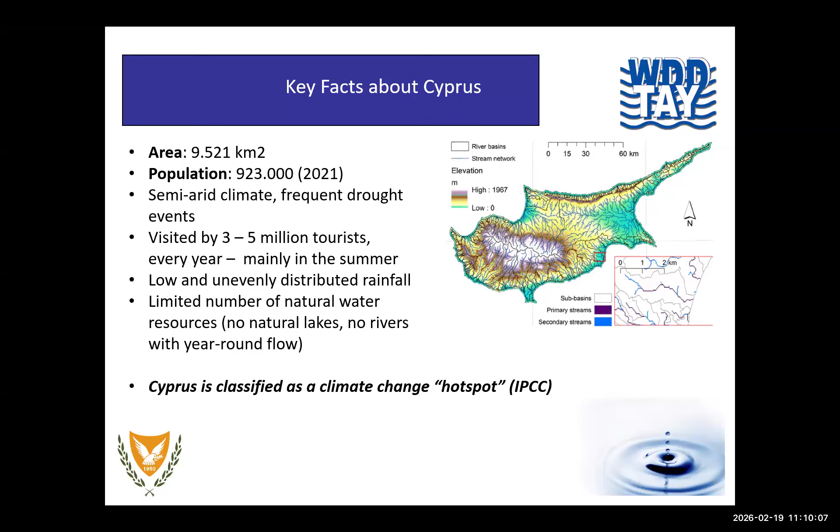We are facing low and unevenly distributed rainfall, and we have a very limited number of natural water resources. Basically, we don't have any permanent surface water, no perennial rivers, and no natural lakes. And the IPCC characterizes Cyprus as a climate change hotspot island, and we can see this rapid climate change within the last 20 years. So this poses a big problem for us.

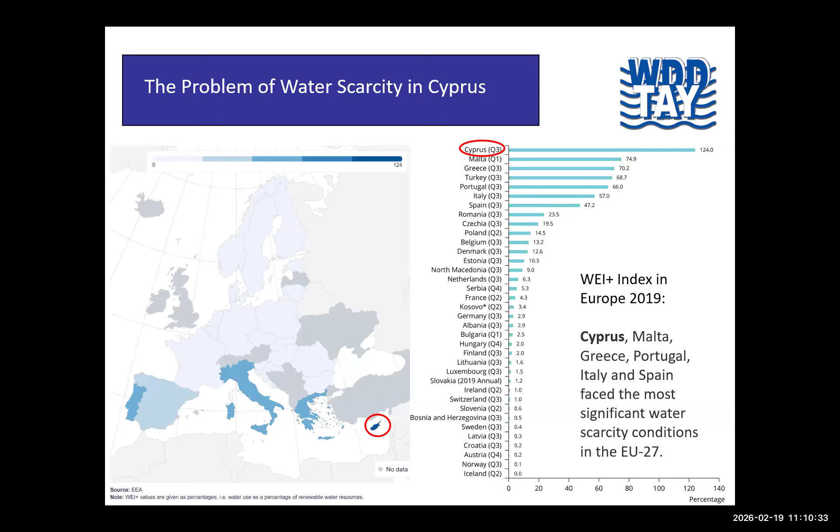According to the WEI+ index in Europe, this is the 2019 one. There is actually a revised one from 2022, but the result is more or less the same. Cyprus is by far the most water-stressed country in Europe, quite far ahead of Malta, Greece, and other countries which share similar problems.

Sorry, there was supposed to be... Okay. Anyway, I will proceed. The statistical analysis of the rain shows that... I'm really sorry. I think there might be a problem with the presentation. Actually, I will try to share it again. Oh, okay. Now I see what's going on.

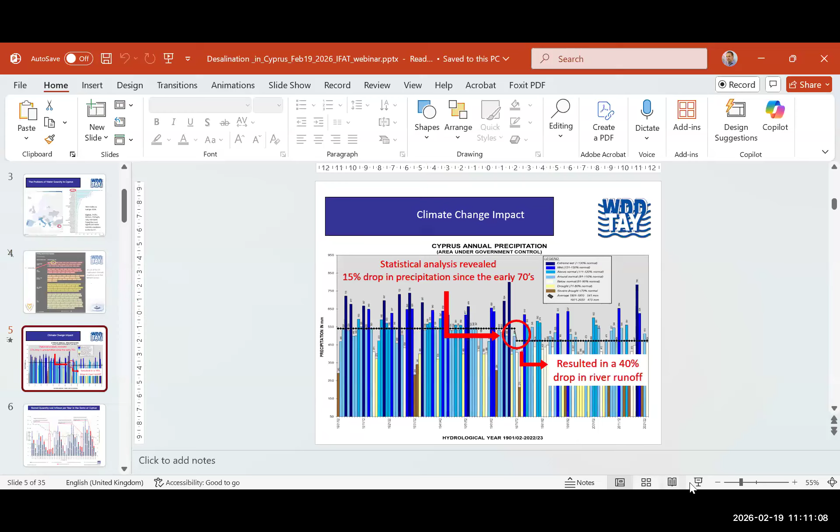Right. So the statistical analysis of the rainfall, the precipitation, shows that there has been a gradual drop since the 70s of approximately 15%. But in reality, this translates into an even bigger drop in the river runoff and the levels of water that we managed to collect in our dams, which is approximately 40%.

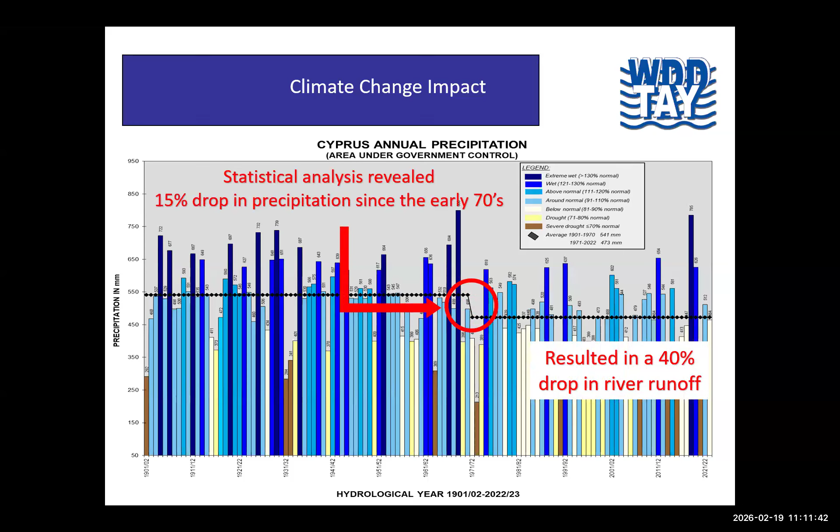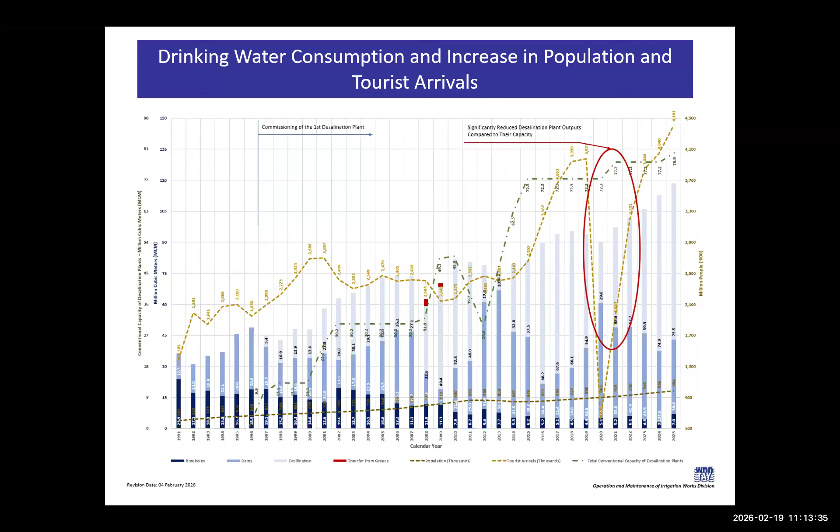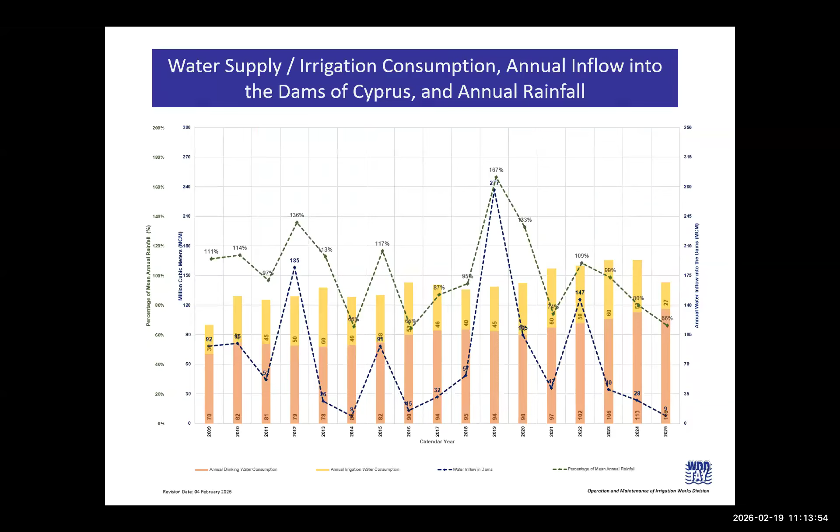Here again, you can see that the annual inflow in the dams and the annual rainfall is quite variable, whereas the actual needs are always there and quite often are increasing. And what is quite important is to note that the drinking water demand has tripled since 1991, as you can see in this graph, which poses an even higher burden on our water supply system.

The reasons for this increase are many and different. There's the increasing population, rising living standards, increase in tourism, both in terms of numbers, but also in terms of the extension of the tourist season, increased water losses from the networks. But what we have found recently is that because of the droughts and the lack of reliability of the boreholes, whenever we connect the community to the public supply, they tend to stop using the boreholes and switch to the public supply, either because the boreholes have dried up or because it's just simpler and more reliable. And of course, climate change has played a significant role.

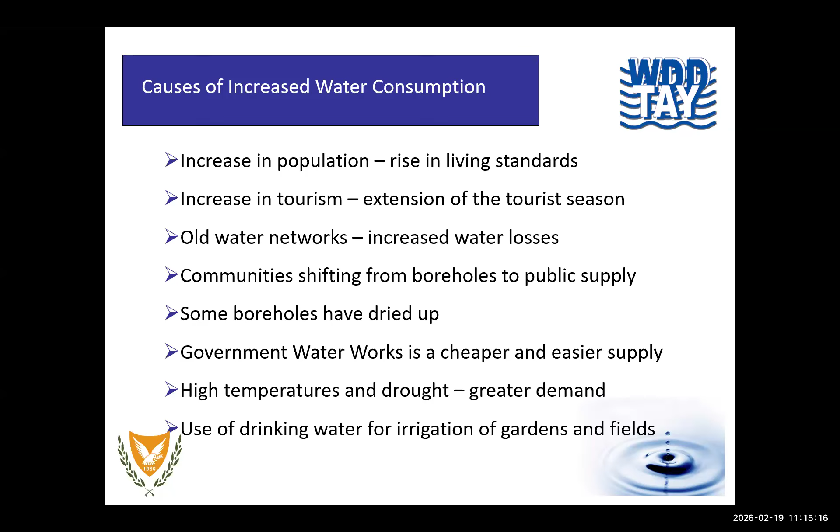The problem is not new. We have been facing this problem since antiquity, I would say. The big efforts to provide a solution started from the 60s when the republic was established. And over the years, we have provided a lot of infrastructure to deal with this problem. The core of our infrastructure is the 110 dams that we have built all over Cyprus in order to collect as much, if not all, of the precipitation that falls on the island, to be able to use it to cover our needs.

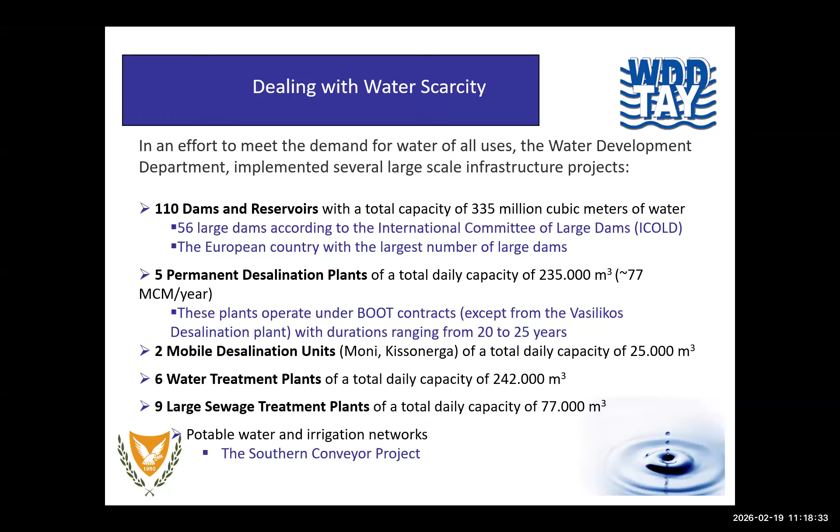It's important to mention the sewage treatment plants because Cyprus is leading in terms of the use of reclaimed water for irrigation purposes. We are currently reusing approximately 89% of the treated wastewater in the areas controlled by the Republic. This has happened out of necessity during the last 25 years, simply because it was the only way to add a reliable source of water for our irrigation needs.

As I mentioned before, currently there are 5 permanent desalination plants in operation with a nominal capacity of 235,000 cubic meters per day. 2 more were put in operation in 2025, and we have plans to build several more. The plan is to reach a total capacity of a little bit more than 400,000 cubic meters per day, so that we can cover the water supply needs at 100% rate with some spare capacity.

The preferred mode of operation of desalination plants is to have them built as PPP, public-private partnerships, under the build, own, operate, transfer contract. In this way, the private companies use their own funds to undertake the design, the construction, and the operation for a fixed period of time, and we pay to receive the water with a unit fee, which is a function of the energy consumption and the fixed costs of plant ownership. And in case the operation of the plant is not required, then we pay a standby fee to the contractor so that he can cover the basic costs.

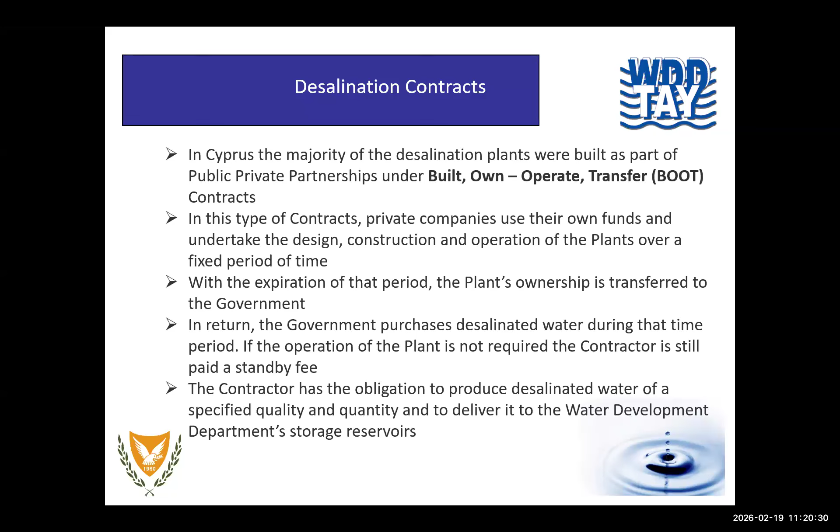Here you see a breakdown of the 5 main desalination units we currently have in operation in Cyprus. 4 of them are of the type that I mentioned. One of them, which is owned by the public electricity unit, is slightly different because they own the plant, but they also provide the quantities in the same manner. And you can see roughly the capacities of each of these units, the nominal capacity and the minimum daily production that they're required to provide.

You can also see the contract unit price and also the adjusted unit price currently, including the electricity tariff and labor index. So you can see the desalinated water in Cyprus is not cheap compared to other areas, and this has to do primarily with the high energy cost on the island. But it is a necessity for us, so we are quite happy that we have the luxury to have this water even at the higher rates compared to other countries.

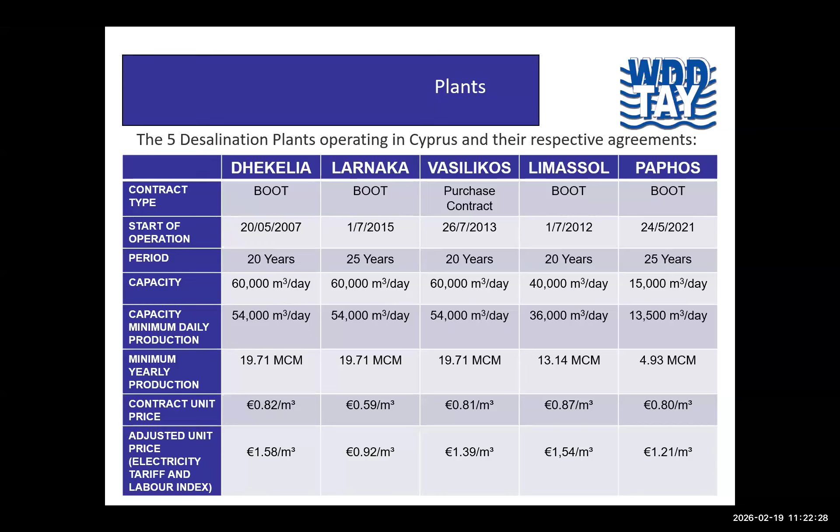You can see some pictures from our large desalination units here, large for our standards, of course. They might be quite small compared to some of the units in Spain or Saudi Arabia and so on, but they are quite big for us. And as I said, they are the backbone of our water supply.

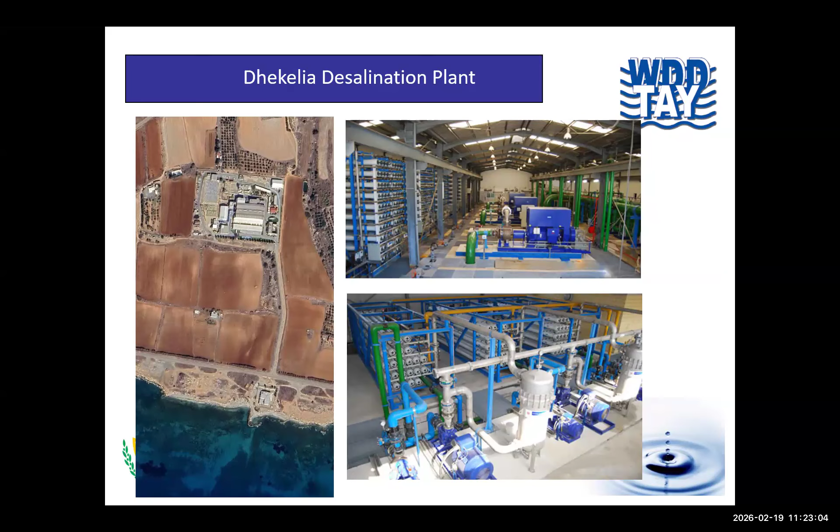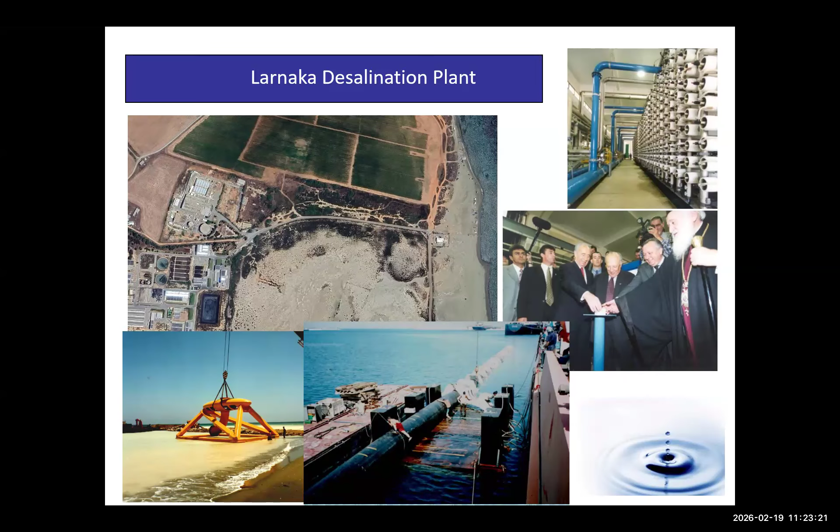You can see here the Dhekelia desalination plant, which is the earliest one. It was built in 1997, but what you see here was refurbished in the early 2000s. The Larnaca desalination plant is the oldest operating at the moment, and you can see here some images of the then President of the Republic during the initiation of the operation, showing again the importance of these units for our livelihood.

The Episcopi desalination plant, the Vasilikos desalination plant, which is the one operated by the EAC, the Electricity Authority of Cyprus, which I mentioned is owned by them. What is quite important for this unit is that it is taking advantage of the synergies of the fact that it is located within

the area of the largest power plant in the country, and it is using the water which is also used for cooling purposes of the power station. So the return of the brine is highly diluted with the cooling water, making it far easier to dispose of it without the need of long and complex pipelines.

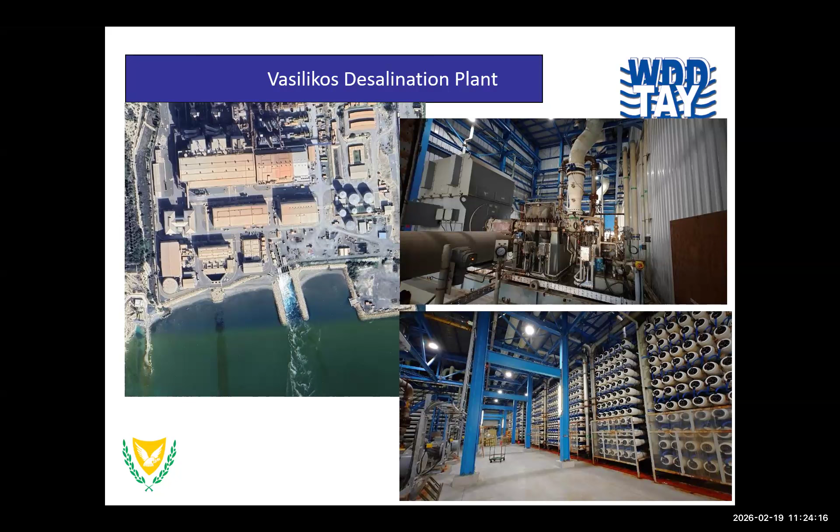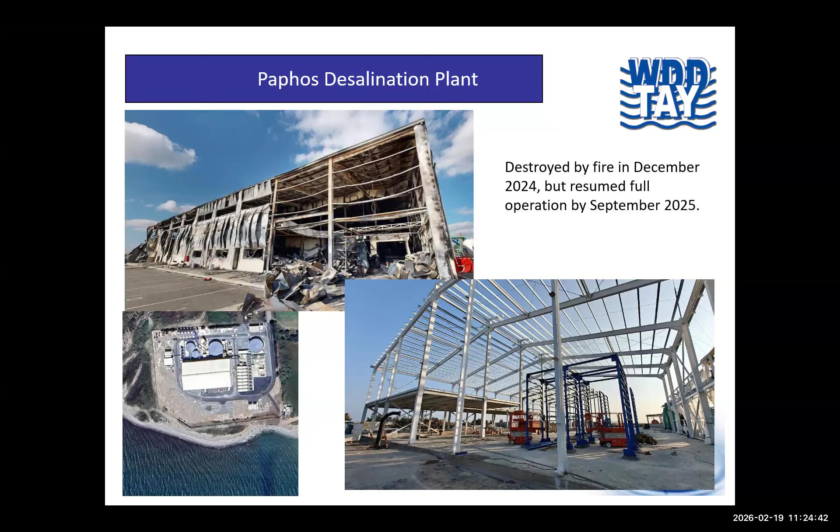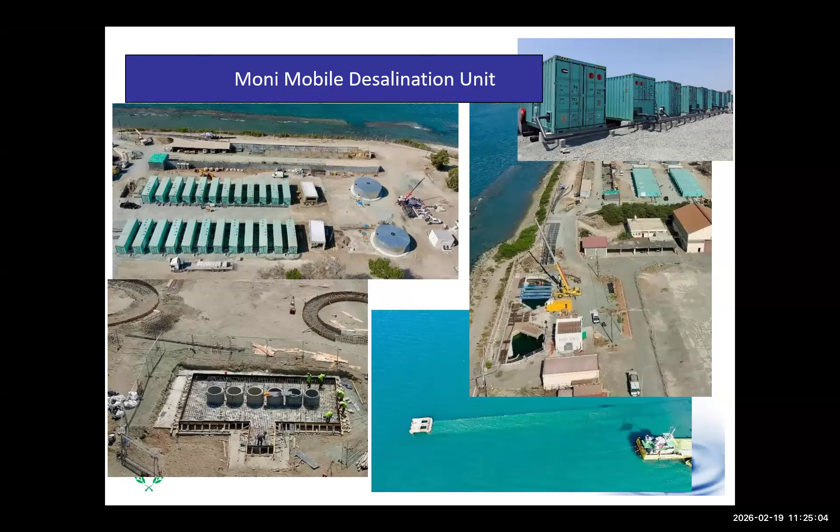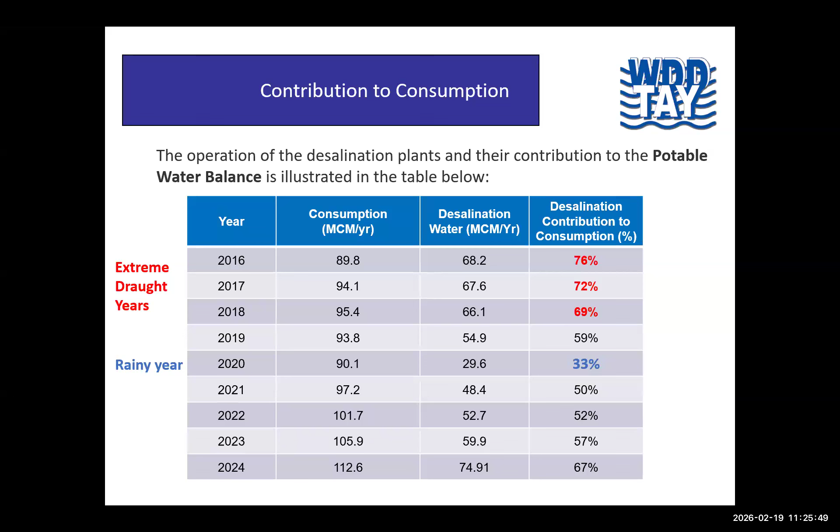But currently in 2025, even though I do not have the figures, I think it has reached back to levels of 70 or 76%. As I mentioned, the strategy of Cyprus will be in the next few years to be able to reach a capacity of up to 100% of the consumption of drinking water.

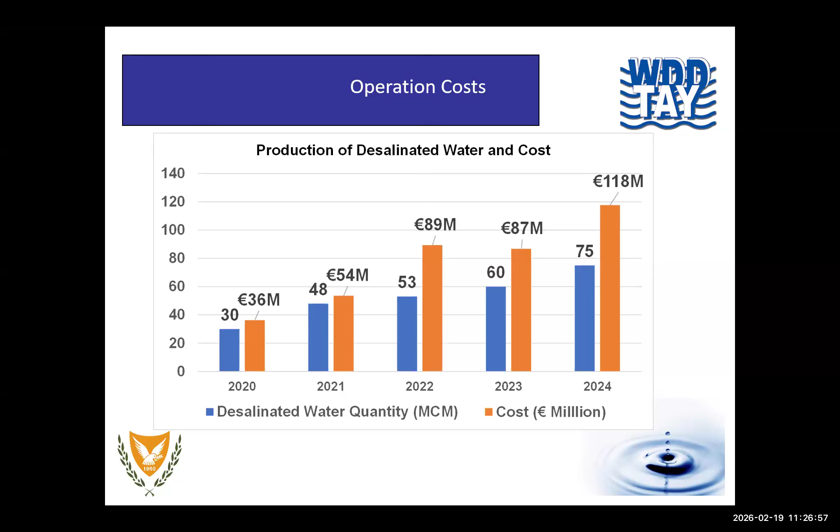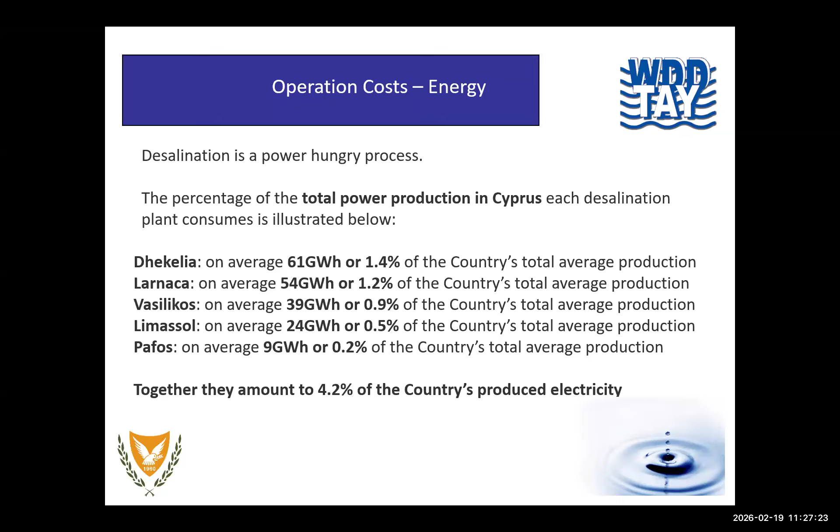And it also has a big effect on power consumption. All of the units at the moment are being fed with fossil fuels, with an estimated figure of 4.2% of the country's total produced electricity. So this is a big burden, not only in terms of cost, but also in terms of energy requirement and, of course, for environmental purposes.

The benefits of using desalination are quite high. Desalination ensures a stable supply of drinking water throughout the year, irrespective of the weather conditions, and reduces the dependence on rainfall and reservoir storage. It meets growing demand under climate change conditions, which reduce the capacity for surface water, and it is a strategic choice for water security for Cyprus.

But the challenges, as I said, are very high energy consumption, dependence on fossil fuels, high water production cost, and environmental impacts. Our goal is to integrate within the next years renewable energy sources as much as we can, and energy efficiency technologies to reduce both the environmental impact and the associated cost. So the challenge for the future is to make desalination as sustainable, efficient, and environmentally compatible as we can.

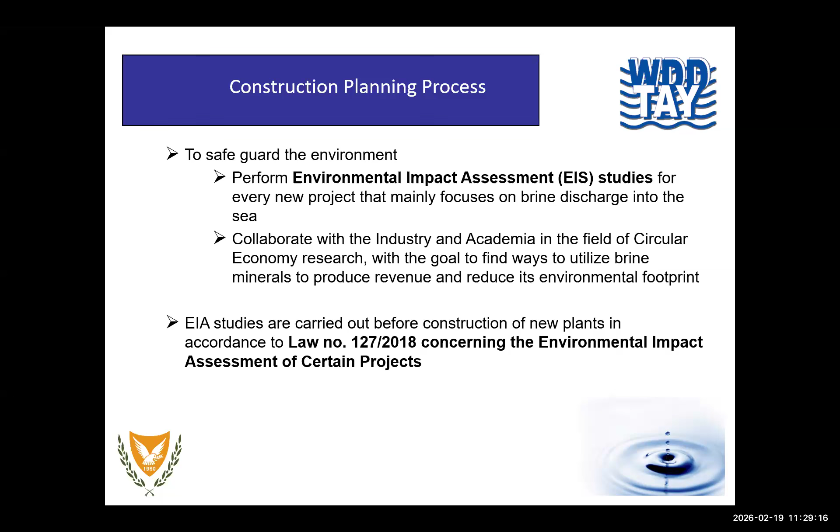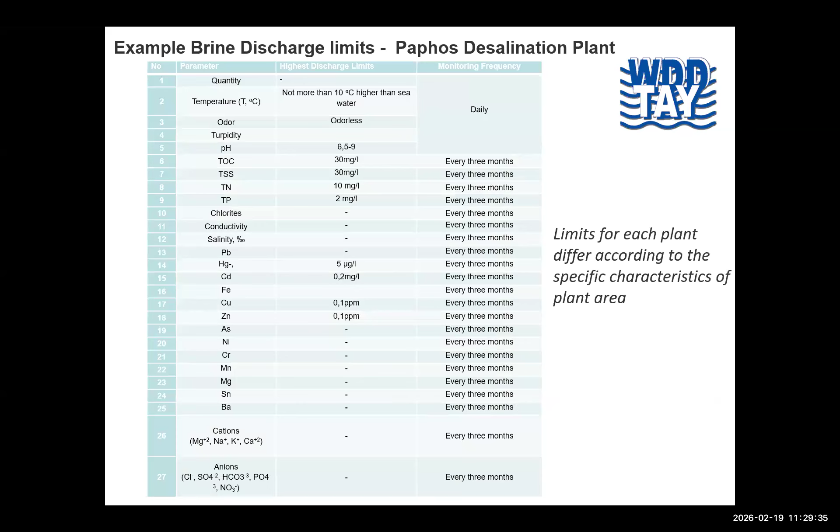We are taking all the environmental considerations, trying to be as environmentally friendly as we can to safeguard the environment. By checking how the existing desalination units are performing, we know that other than the impact of higher power consumption, the impact to the sea is very low. This is because we are safeguarding both the quality of the brine, which is reduced, and also making sure all processes during desalination are done exactly as required in the terms of reference by the contractors. The rest I have already more or less explained.

And with this, I will thank you for your attention, and I will also show my face now so that you can have any questions.

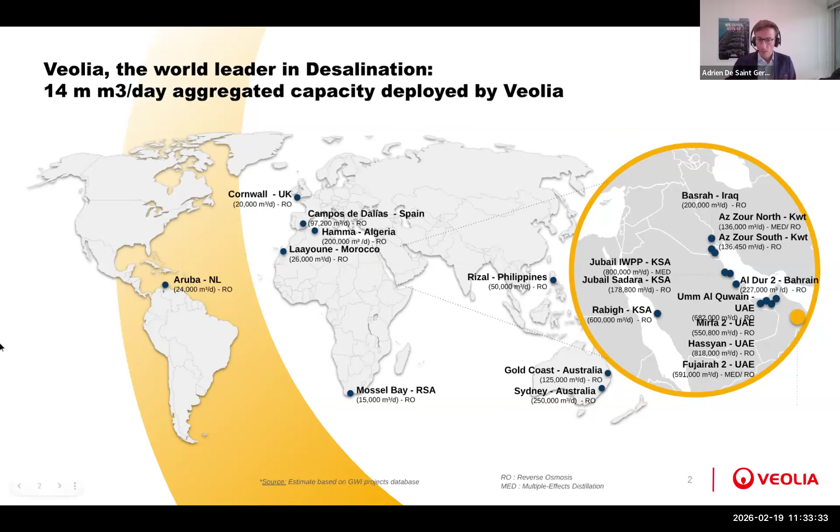The key point I mentioned is about affordability. I think that's the key challenge of our industry, how to make the price of desalinated water affordable, somehow as affordable as traditional water could be. That's the challenge. Our strategy there is to focus on the global cost of water, and I think we see it on the presentation about Cyprus.

Looking only at the capex will miss a key point of the equation. We have made some analysis, and we could say that 45% of the cost of desalinated water is about energy. So the first key point at Veolia for us is working on this 45%, and I can say that we are chasing each and every kilowatt hour that the desalination process is consuming.

We used to be at 20 kilowatt hours per cubic meter in the 90s with thermal desalination plants. Then we shifted to reverse osmosis plants, which reduced the bill to 5 kilowatt hours per cubic meter. And now, by continuously improving our process, we are reaching a limit of 3 kilowatt hours per cubic meter, which means that in about 15 years, we have divided the power bill, or energy bill, by 7. That's a key achievement in the way to reduce the cost of water.

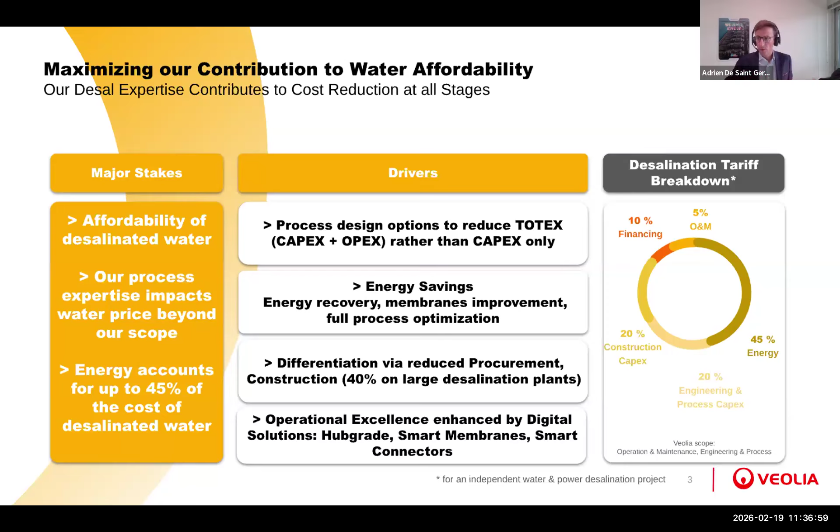The second component when we are talking about sustainability is about protecting the environment. This is a key challenge for desalination. As you know, the current process, let's make it simple, to produce 1 liter of fresh water, you have to dispose about 0.8, 0.9 liters of brine. So the key question is how to make sure that this brine is not impacting the environment. So we develop process know-how, we develop technologies, we develop ways of doing things, and we continuously improve.

The key point here is to always be very strict on respecting the local regulation. So each time we deploy a desalination plant, local regulations are applying. We develop models upfront to ensure that the plant, when it will be under operation, will meet those requirements.

And practically, in terms of technologies, for example, in Oman, we use beach wells as intake. The sand is acting as a natural filter, which is reducing a lot the chemical consumption, and as such, the chemicals that could have been disposed in the brine. There is another way to reduce the impact of chemicals on the brine by treating them with a specific package on the plant.

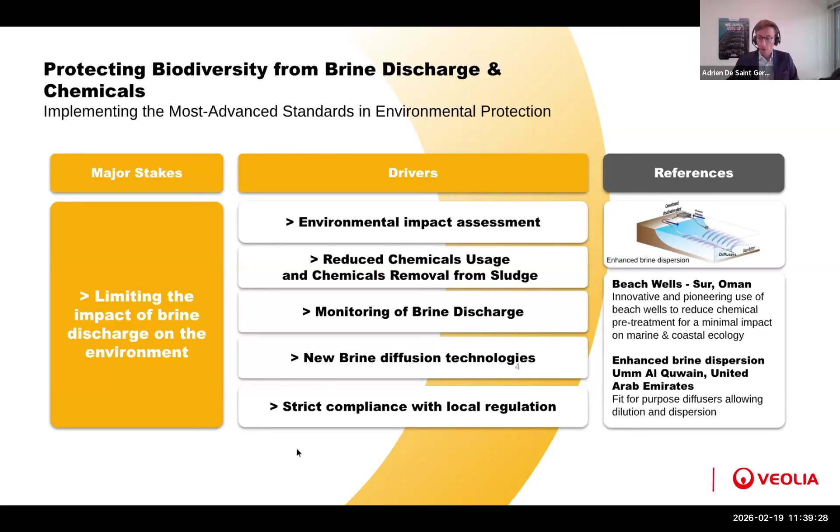Another way of managing the dispersion of brine is what we have done in the Emirates, where we have implemented a very fit-for-purpose dispersion design to ensure that by combination of salinity, temperature, and using the existing current, the brine is properly diluted and dispersed at the time of discharge. So our strategy is based on sustainable desalination. Let's see how we deploy it globally in diverse environments.

As I mentioned earlier, the first key area is the Gulf. If you want to be the leader on the market, you must be the leader in the Gulf countries. So we have a deep focus there. I think we have built up over there something like 7,000 or 8,000 million liters a day of capacity since the 70s. This is the big chunk of the market.

The key model we are using and following is the PPP model. Our colleague from Cyprus was mentioning the BOOT model. That's the same approach. It's where we focus on the total cost of water rather than on the capex. It's really where we can deploy our process know-how and engineering capabilities to develop the most efficient plant and the most affordable plant in terms of delivering water.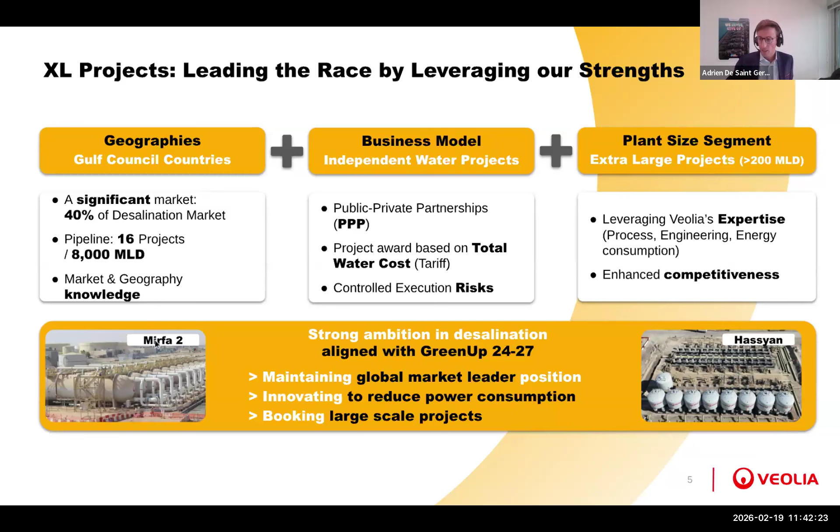If we look at other market segments, I would say from 50 to 200 MLD, we are approaching the market a bit differently.

Mid-sized plants are requiring a fit-for-purpose design rather than a standard approach. And here the idea is to combine Veolia WaterTech global capabilities, engineering, and procurement, with water operation local expertise.

The idea is to build our strategy on three core pillars. The first is our process and engineering expertise, which will provide the most optimized design based on the local condition. That's quite important. The design will not be the same if you are in South America, in Australia, or in Europe. You have to adapt to the local condition.

Then we will deploy our technology portfolio. At WaterTech, we have several technologies that we have built up for the market in the Middle East and that we can now deploy in other geographies. The idea is to feature a plug-and-play approach that will limit construction cost and risk for our customers.

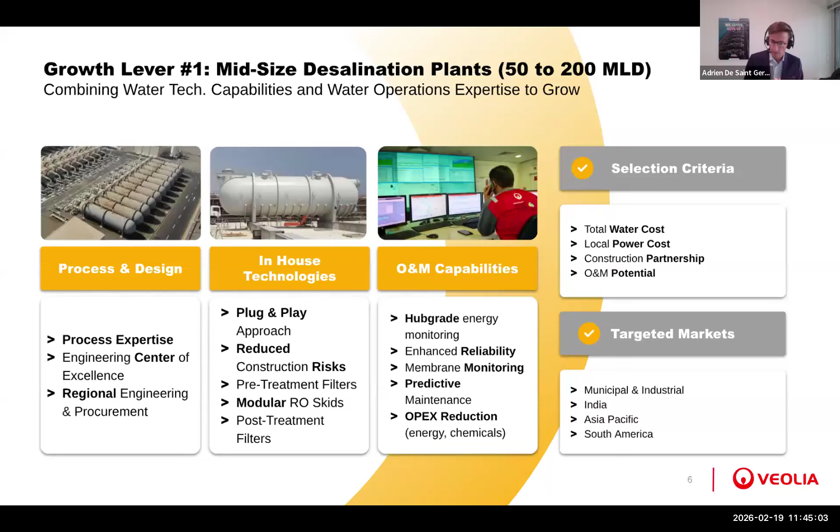If we go to a smaller segment, that may be what our colleagues from Cyprus are looking for, ranging from 5 to 50 MLD plants. Here we are looking for something very standard and scalable. The idea is to integrate our core technologies. So I mentioned the filters for pre-treatment, filters for post-treatment to make potable water.

And we have a key innovation there, which is the barrel. The idea is really plug and play, reduce construction cost. Everything is outdoor, no more buildings. You deliver, you plug, and you operate. That's the idea. So faster delivery, reducing construction cost and risk, safer operation and maintenance. And our technology is, I would say, digital native, so it's a big lever as well in terms of operation and maintenance cost.

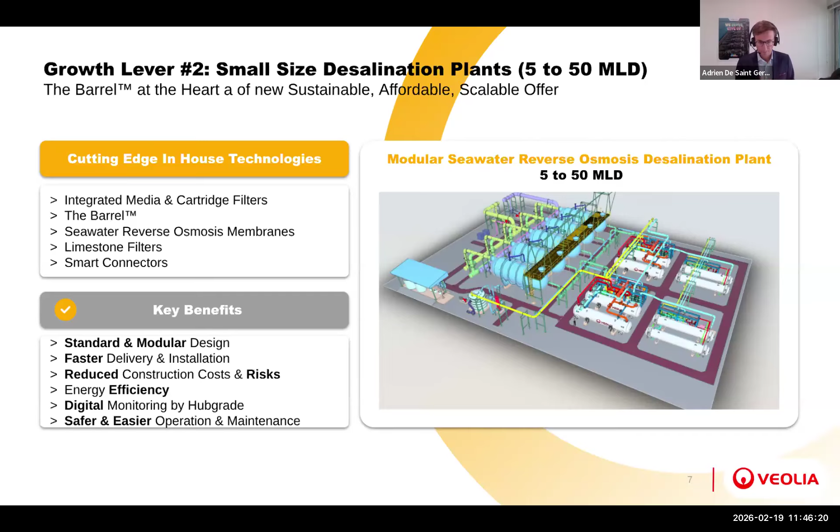To conclude, I would say that Veolia's desalination strategy is leveraging our core strengths, which are technological innovation, operational excellence, and geographical footprint. Our idea is not only to deliver desal projects, it is to provide sustainable water security to communities and to industries, depending on the local conditions. And I think that with our energy efficient and cost-effective solution, we are well positioned to maintain our global leadership position in this specific market.

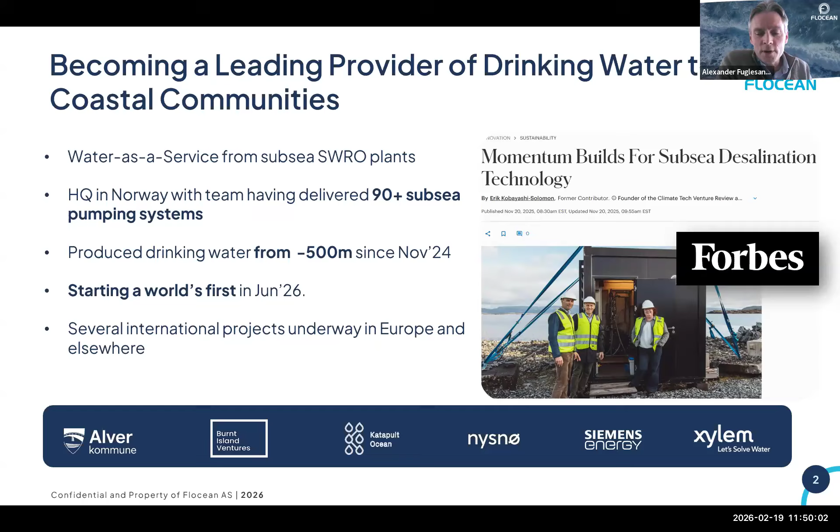So it's great to be here, and we truly see Europe as an important market, together with some of our key partners like Xylem and Siemens Energy and ocean and water impact investors. Recently, we are getting some news, so we are really transitioning right now from an R&D project to a commercially viable solution. So these are very exciting times to be meeting with the marketplace and creating value.

We are firm believers in traditional desalination and reverse osmosis. It's a great technology, and we think it really has saved lives and helped economic development. But it has some issues, and hence we are representing a new approach, which we're pretty excited about.

Here you see a plant which is in the Middle East. It takes up quite a lot of land area. You have a lot of new technologies dealing with intake and outfall, but still there are issues with environmental permitting regarding intake and brine outfall, and you have quite energy intensive plants. Like Veolia mentioned, 45% of the cost can be traced to energy consumption. So these reverse osmosis plants are still quite energy hungry.

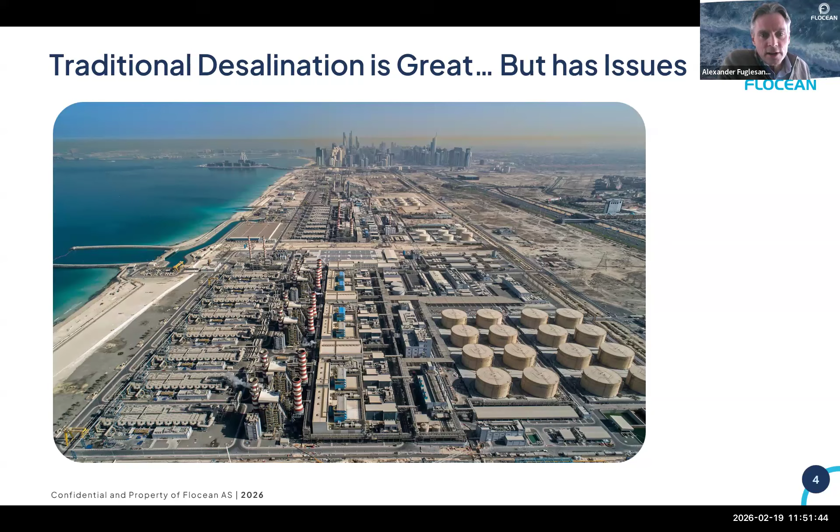So another thing is that these traditional plants are exposed to surface events like weather, flooding, storms, sandstorms, algae blooms, and even national security elements like sabotage and so on. Here we see some of the traditional challenges with the traditional infrastructure, and in regards to weather, there's more intensive weather events now than before. So you can really see some exposure to traditional infrastructure, which is increasing the cost and reducing the uptime of desalination plants.

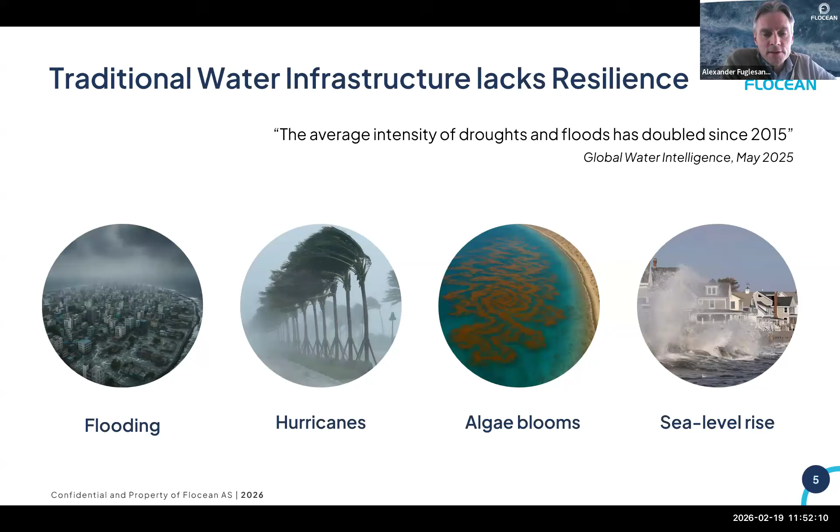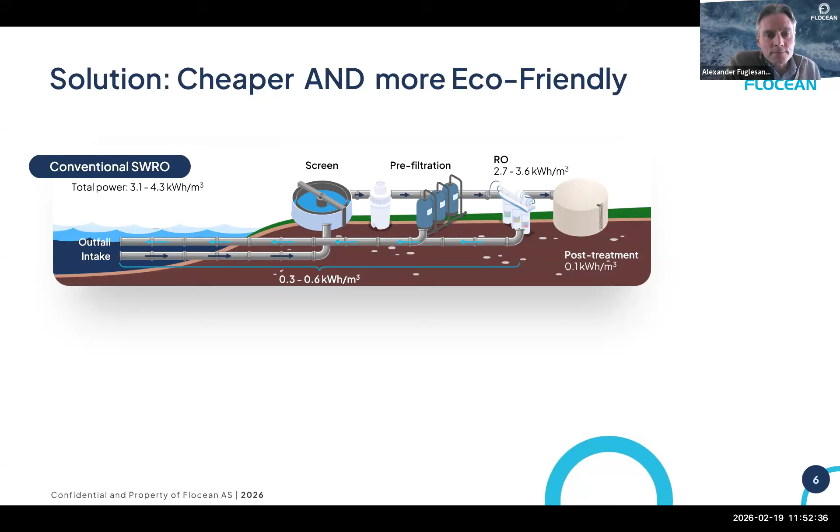In a conventional RO plant, very much simplified, sometimes up to 50% of the infrastructure can be related to the pre-treatment of the seawater if it's coming from surface. Of course, it's better if it's coming from boreholes, but the boreholes can be clogged by flooding, and you have quite a land intensive setup.

With the Flocean system that we're going to introduce in more detail, it's basically a more standardized solution where you, from the deep ocean, get hydrostatic pressure for free. So that helps to drive the energy down by 30 to 50%. And you also have access to more predictably clean water, so you can really minimize the pre-treatment.

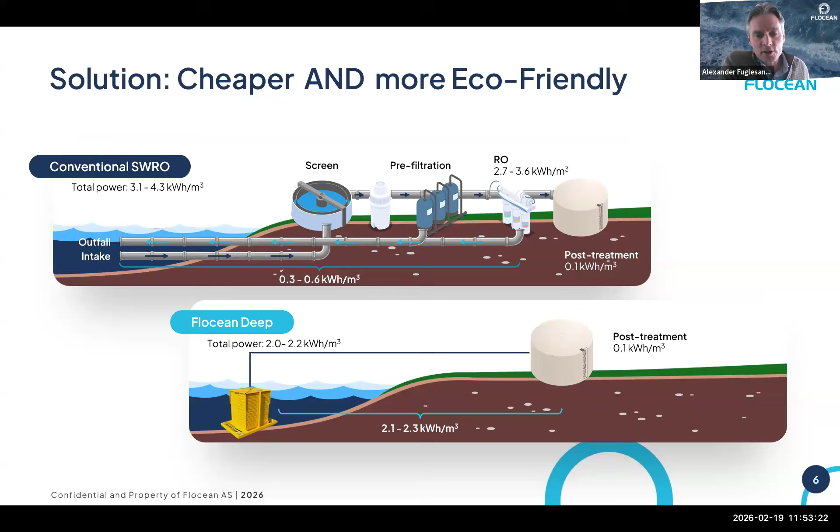Hence, you can be a very efficient plug-and-play solution to traditional infrastructure, or you can offer a completely greenfield solution in a much more distributed way, as opposed to a more centralized way, which is normal for the kind of giga plants where you have a high cost of distribution. So it's really a more simple plug-and-play system.

Here you see a bundle where we have 8 pods connected to a single power cable from shore and a single pipeline which is transporting the fresh water back to shore. So all the desalination process happens between 400 to 600 meters beneath the sea level, and this is providing both improved economics, capex and opex, as well as a much improved environmental aspect. So the eco-friendliness becomes tremendous in many dimensions.

Both in terms of lower emissions, because many of these plants are still powered by fossil fuels. You have also much less impact on the ocean environment by not using any chemicals and having a more diluted concentrate on the seabed. We're looking at something like 20% higher concentration of salts in our outfall. So it really quickly mingles with the surrounding seawater at depth, which is also quite far away from most of the bioactive areas in the ocean, which are usually in the more shallow areas.

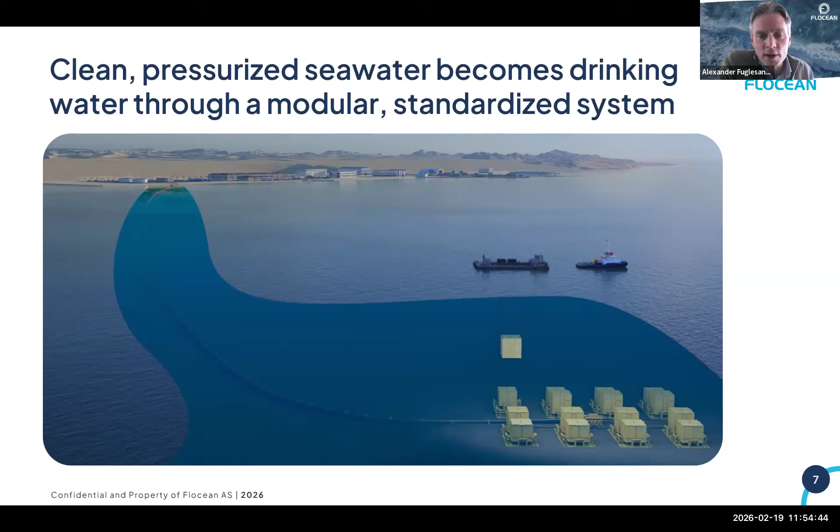So the sort of trifecta we are helping with is really a more economical access to drinking quality water, and it's reducing emissions and it's improving ocean health at the same time. In a lot of sort of clean tech infrastructure, you are really having some opposing forces. But in our case, we really like to think that we're solving for three things at the same time. Significantly helping permitting time and also then the scalability of the solution.

So I mentioned it's not just a research project anymore. We are really proud that we have our first system. It's a 1,000 cubic meter per day or 1 MLD system that we are currently building in our own factory. We are implementing that on the west coast of Norway over the next few months and switching it on in June this year. It's the first subsea desalination plant ever built with commercial revenues, and the client is Alver municipality.

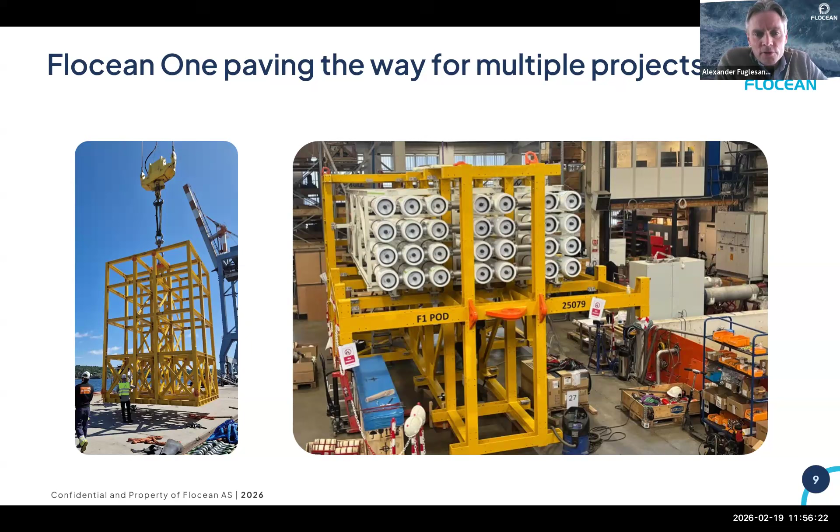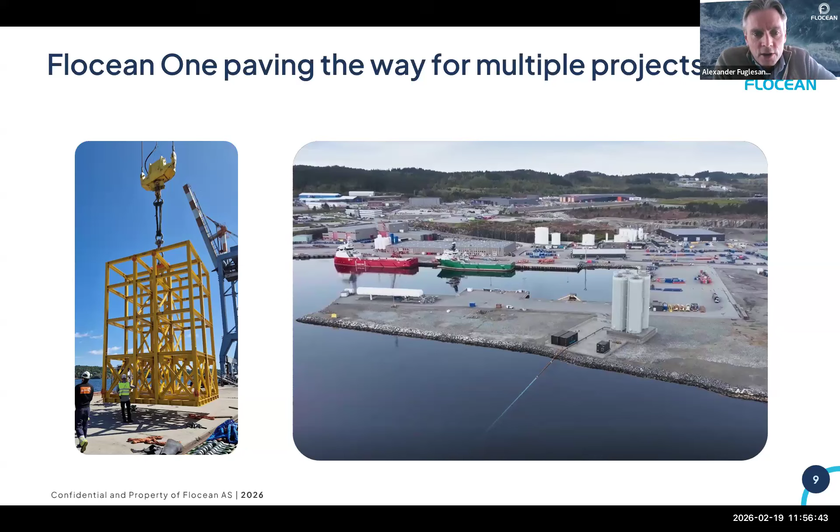So imagine if there's water scarcity on the west coast of Norway, where we're actually having more rainfall than most places in Europe. That says something about the situation. So here it's really for the resilience aspect, as well as industrial development on this peninsula where they don't have access to traditional mountains and rivers. Here you see the site called Mongstad, where there's aquaculture, a data center in planning. There is Norway's only refinery and a few other exciting green technologies being built. All of them need water, and they need more water than they currently have. So we are excited about that development.

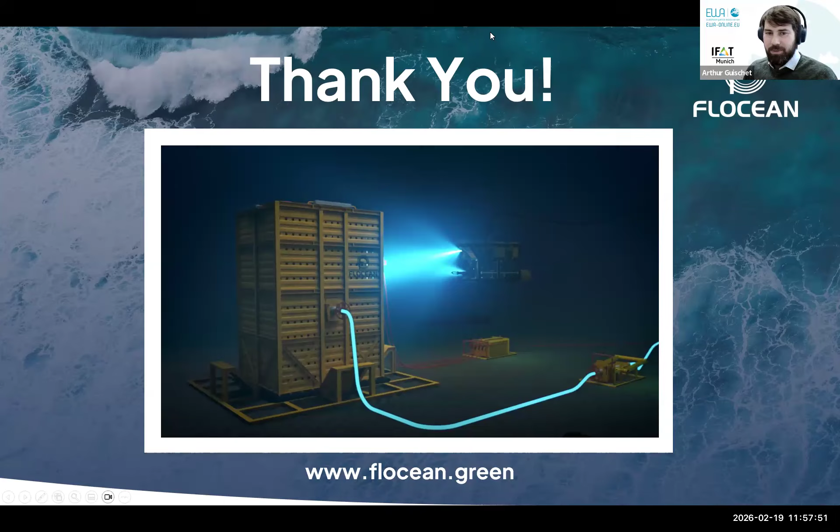I will start not from the first one in the chat, but we had actually one that was for you, Adrien, but I think that can apply to George and Alexander as well. Adrien, it was for you from Regin Ullmann. Since many of your clients are in countries with a high amount of solar energy, do you include a standard solution for solar power in order to minimize strain on existing electrical power supply infrastructures in your activities? And I think we can maybe reshape it a bit to say same for you, George, in Cyprus, or for you, Alexander, but then maybe Adrien, you first.

That's an excellent question. What we have seen, I would say 10 years ago in the Middle East, is yes, there were initiatives to implement solar solutions directly fitted into the desal plant. Nevertheless, this approach has been a bit put aside by the local authorities from Saudi Arabia and the Emirates, mainly because that was not the best way to produce solar energy. So their approach now is more to say, industry from desal, please focus on providing the most efficient desalination solution. And they address their solar demand to a specialized company for producing solar plants.